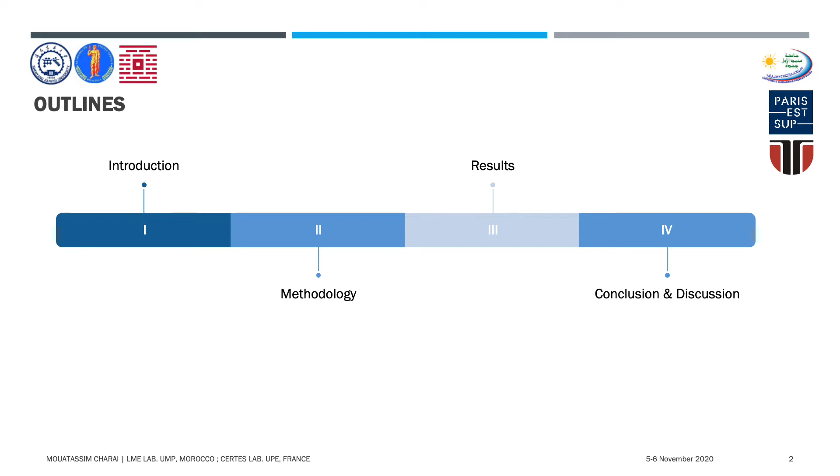As you know actually, the building sector is one of the most important worldwide energy consumers, and has become one of the major preoccupations of governments. For instance, in Morocco, the building sector, including residential and trade, is responsible for over 50% of the final energy demand and 25% of carbon dioxide emissions. More specifically, the residential one contributes to 33% of the energy consumption.

Indeed, the building sector is the largest energy saving field that we can focus on to reduce the heavy energy dependence of Morocco on external energy supply. To cope with this, we see two main solutions. Firstly, the net zero energy building approach, which is based on in situ production. The aim is to produce the energy needed locally by the building for the building itself to achieve the equation consumption equal to production, which is the trend and challenge for researchers today.

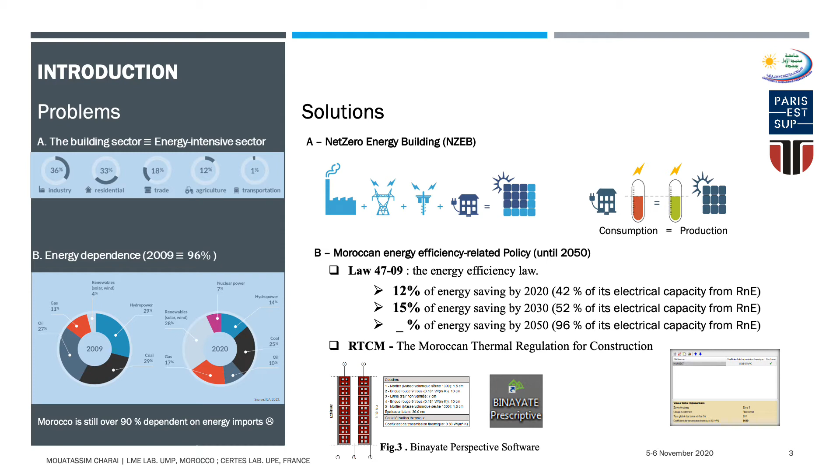The second one is about the policies and strategies adopted by each country. For example, Morocco deployed a promising policy for enhancing the energy efficiency of buildings, represented by the Building Thermoregulation Standard. The main objective is to reduce the energy consumption by 15% by the end of 2030. Moreover, the Moroccan Agency of Energy Efficiency has developed a building software known as Binayate. In fact, it was developed in 2014 to help building constructors choose the good composition of building materials to build compliant envelopes.

In this present work, we focus on these building materials and answer the question to what extent they are efficient and to what extent they participate in designing high performance and passive buildings. To this end, two studies were performed. The experimental study, which consists of the characterization of the thermophysical properties of a set of building materials commonly used in construction, as shown in Figure 1. The thermal transport properties of each sample are identified using the hot disk method given in Figure 2.

So as you can see in Figure 3, two identical samples are needed. The first step is to sandwich the hot disk sensor between the two identical specimens, with some pressure applied to reduce the contact resistance. The hot disk sensor indeed represents the main part of the method, serving as both a heater element and temperature sensor. So after thermal stabilization for up to 15 minutes, the samples are heated with a direct electrical current generated by the sensor. The surface temperature variation is then monitored over time with the same sensor. And finally, the thermal properties are calculated simultaneously based on the recorded time-dependent thermal response using specific parameter identification algorithms.

On the other hand, to assess the energy performance of the studied samples at the building scale, a numerical study of the impact of these building materials on the annual energy consumption of a typical residential building located in Eastern Morocco was carried out using EnergyPlus software.

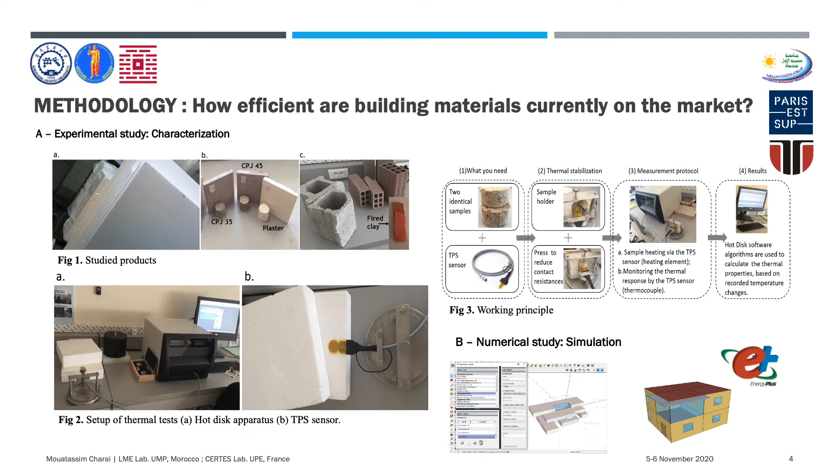In this slide, the experimental results are presented. Table 1 shows the thermal conductivity, thermal diffusivity, specific heat capacity, and the apparent density of studied building materials. For hollow bricks, and due to the fact that the hot disk methods are used practically for solid samples, we firstly characterized the fired clay constituting the brick.

Then, we estimated the thermal conductivity of a 12-hole brick using the electrical analogy of heat conduction as presented in Figure 1, based on the thermal circuit shown in Figure 1D. For validation purposes, the thermal conductivity of hollow bricks was also characterized using the boxes method shown in Figure 3.

Unlike the hot disk method, which is based on a transient technique, the boxes method calculates the effective thermal conductivity of the total samples in steady-state regime, taking into account the air pores. As you can see, the measured and the estimated thermal conductivity values of hollow bricks are in good agreement.

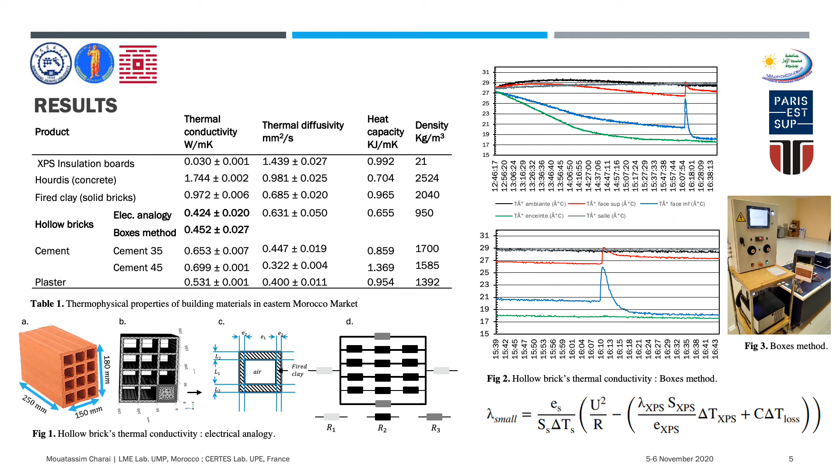According to this characterization, we will use these properties as input parameters in the EnergyPlus simulation program to evaluate the energy performance of several typical walls in Morocco. For these building simulations, a two-story villa type with a ground floor area of 80 square meters was chosen. The 3D model of the building, as well as the 2D plans, are shown in Figure 1 and 2 respectively.

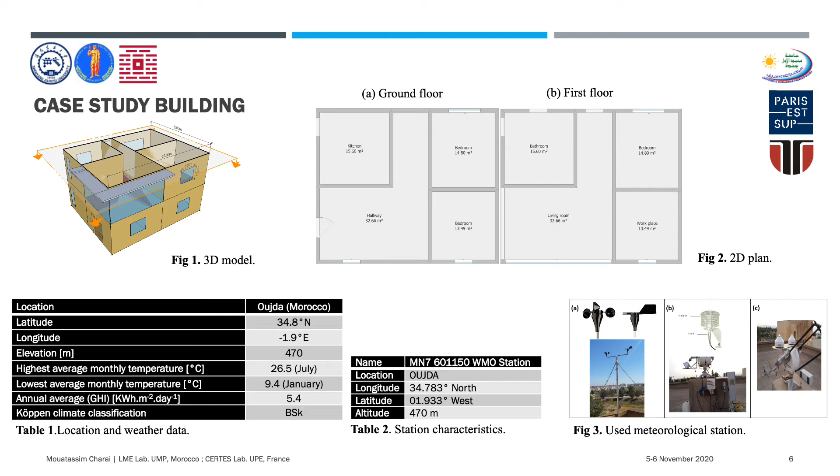The simulations were carried out using EnergyPlus software version 9.0.1. The building is assumed to be located in Oujda, and the climatic data are listed in Table 1. For the weather file, we use data collected from the High Precision Meteorological Station installed at the Mohammed I University. The main parts of this station are shown in Figure 3.

In fact, we simulated the thermodynamic behavior of 4 different walls according to construction practices in Morocco: simple hollow brick, double hollow brick with air gap, double hollow brick with 3 cm insulating panel, and the last one, which represents the compliant building envelope, in which the roof is insulated with a 60 mm XPS panel, according to the Moroccan construction standard. The input parameters of these simulations are listed in Table 1.

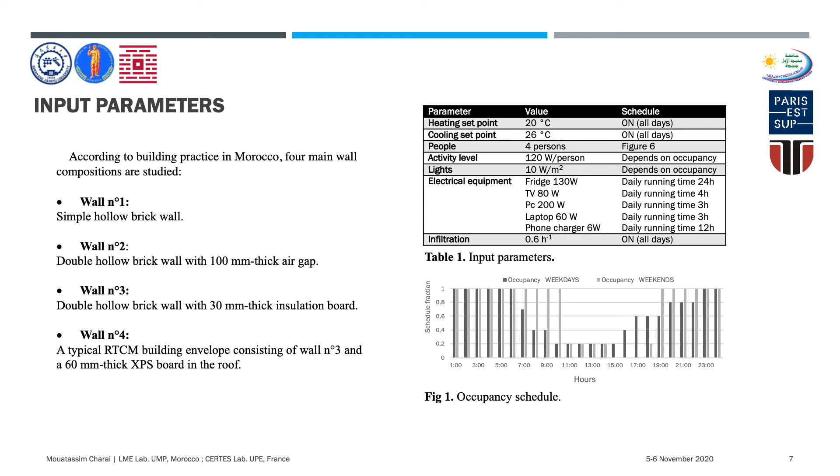In all the cases, the building is assumed to be occupied by 4 people according to the occupancy schedule shown in Figure 1. In this slide, the annual energy consumption of studied envelopes are presented. The results show that the building with simple hollow brick wall consumes approximately 69 kWh per square meter,

exceeding the maximum admissible by 30%. We can notice also that the use of air gap is a good practice for designing efficient walls. Using 10 cm of air blade can reduce the heating and cooling loads by 15% compared to the simple hollow brick wall. Unlike air gap, the use of insulation boards is better for designing efficient walls with small thickness, representing an energy saving of 18% compared to the reference.

Moreover, the simulation showed that the use of 60 mm thick insulation boards in roofs allows the construction of compliant buildings located in cold Moroccan semi-arid climates. And finally, the average monthly temperature graph shows that the available practices for Moroccan constructions and the current building materials are only efficient for passive heating. Therefore, further studies on passive cooling techniques are greatly required for achieving low-energy buildings in Morocco.

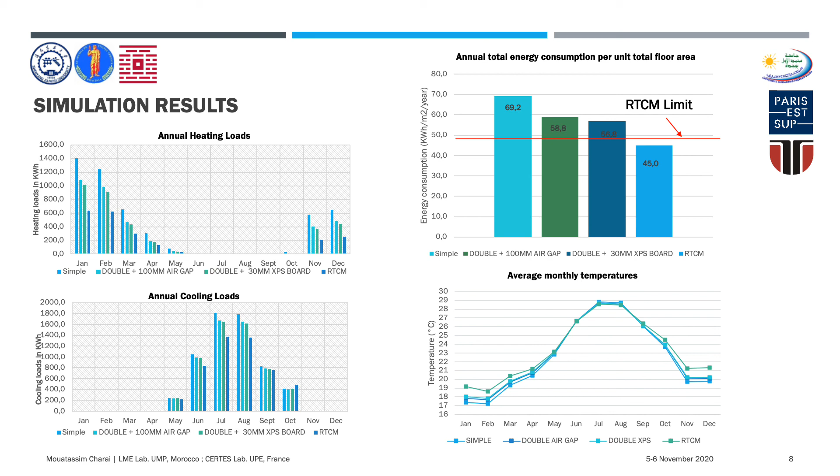As a summary, from the present study we can draw the following conclusions. Firstly, the experimental characterization allows us to develop a small building materials database from Eastern Morocco, that we can use in parametric design analysis, for example. Secondly, the present study showed that the thermal conductivity of Moroccan cement-based products ranges from 0.65 to 0.7.

Also, insulation materials with a thickness range of 3 to 6 cm are highly recommended for compliant building envelopes, especially for compliant roofs. And finally, research and development in building materials are highly needed to develop efficient building material products in order to design high-performance, lightweight building envelopes in semi-arid climates in Morocco.